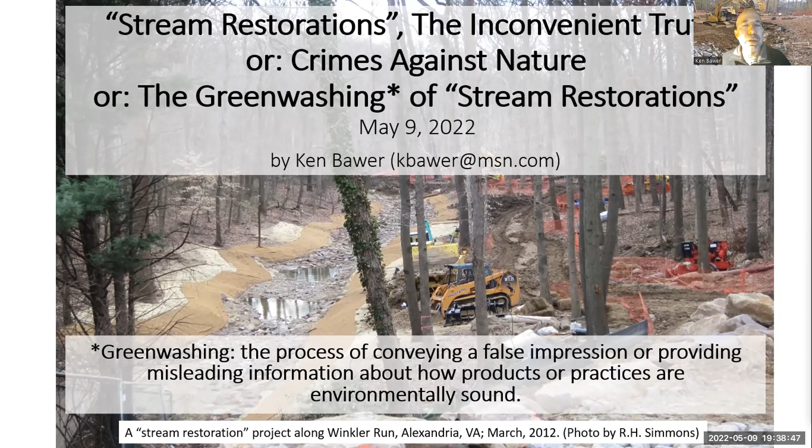I'm going to cut right to the chase in case you get bored. By the end of the presentation, most people ask, well, so what can we do? So let me just tell you right up front, I'm asking you to contact your elected officials at the county, state, and federal level and ask them to introduce a bill to ban stream restorations. This is not a radical position. We banned DDT, we banned thalidomide, we banned lead in gas, we banned lawn pesticides in Montgomery County. So this presentation will explain why this is so important.

Stream restorations are construction projects, pure and simple. And there are several different types of stream restorations, but the most common ones are engineering projects done to try to stabilize eroding streams by using heavy equipment, such as the excavator shown here, to modify a stream channel.

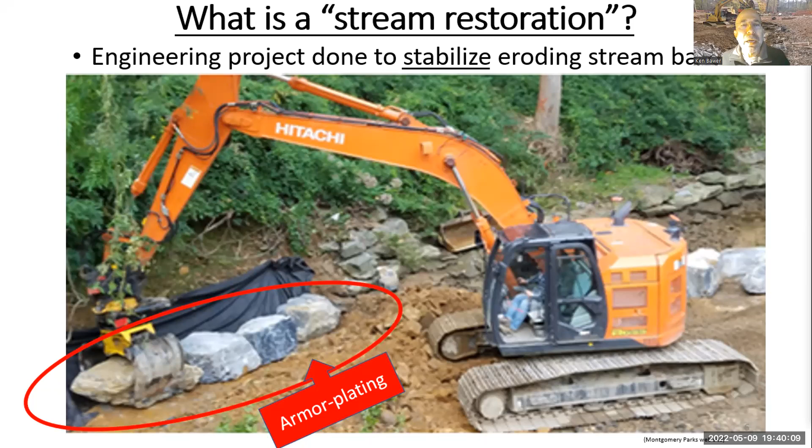And this typically involves a mix of straightening or changing a stream's natural meander pattern, placing heavy boulders to armor plate sections of the stream, as shown here, scraping away stream bank soil, using soil stabilization mats that may or may not be biodegradable, dumping fill material in the stream to raise its level, or even filling in the stream channel completely and moving it to a different location.

So why are stream restorations done? The primary reason stream restorations are done by Montgomery County and Montgomery Parks is to meet their MS4 permit, although as I said before, they are not required to be done. MS4 stands for Municipal Separate Storm Sewer System, and an MS4 permit is required for jurisdictions that have separate pipes for stormwater than for their sewer system.

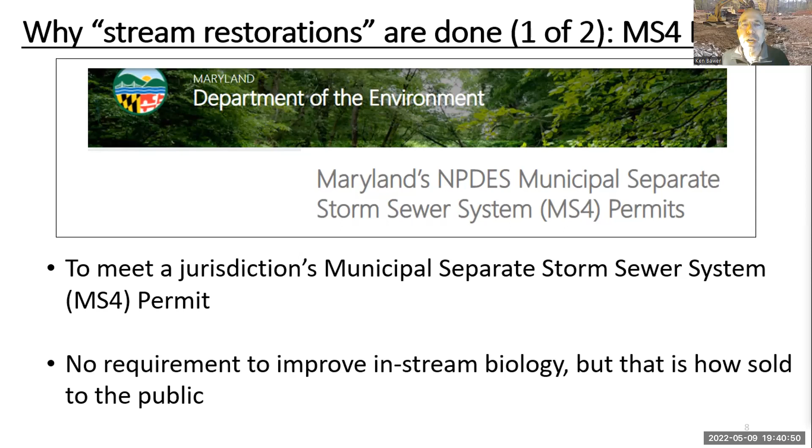The MS4 permit system is an effort to clean up the Chesapeake Bay by reducing the amount of sediment, nitrogen, and phosphorus, those three things that enter the bay from point sources. And the point sources in this case are the stormwater pipes that dump into streams.

So the inconvenient truth, contrary to the propaganda and greenwashing by the multi-billion-dollar stream restoration industry and their government enablers, is that stream restorations don't actually restore anything, not the streams themselves, either physically or biologically, and especially not the whole ecology of the entire construction site, which is always way beyond the stream itself, as you can see here.

This is a so-called stream restoration in Chevy Chase at Audubon Naturalist Society, of all places. It is not restored to look like any natural stream that probably anyone has ever seen. This area used to be fully wooded. And the rhetorical question is, how are fish and salamanders and other aquatic organisms supposed to move up and down this so-called restored stream? And the streamside plant community was totally wiped out.

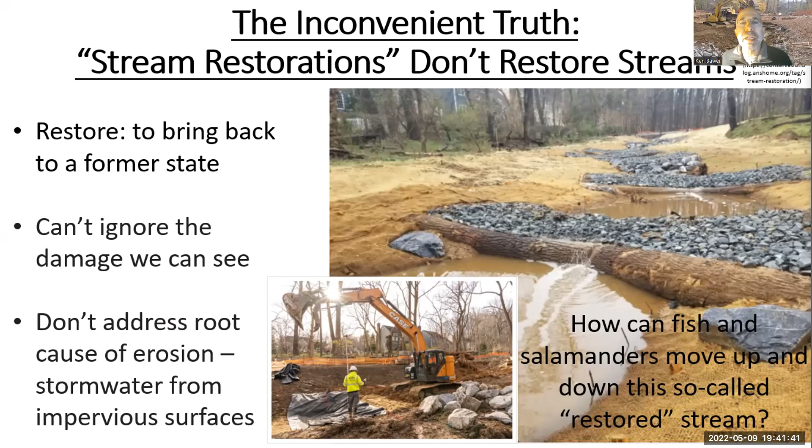So just to be clear, I am in no way opposed to infrastructure protection or repair projects, such as protecting undercut roads or exposed sewer lines, as shown here on the left and in the middle. These are necessary infrastructure repair projects. These are not stream restorations. And note, if you do an infrastructure repair project like one of these, they don't get MS4 permit credit.

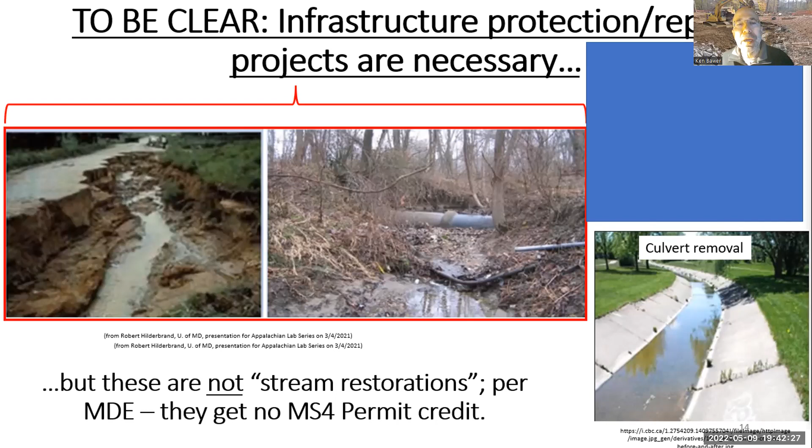Why? Because Maryland Department of the Environment, or MDE, says these are not stream restoration projects, like daylighting buried streams and removing concrete culverts. They're admirable projects, but they aren't considered stream restoration projects by MDE, and they get no MS4 permit credit.

These are photos of the Falls Reach Stream Restoration Project in Potomac. Before on the left shows a perfectly fine natural stream. Yeah, there's a bit of erosion, as all natural streams have, and no urban or suburban stream in Montgomery County is in pristine condition. The small inserts in the middle show some of the heavy equipment that was used for this project. And I took all these photos, except for the one on the left.

And the after photo on the right shows that the stream restoration completely destroyed the forest community in its footprint by scraping the forest floor bare. They destroyed the natural character of the stream by straightening it out, armor plating sections with stones, creating artificial rock dams that block the movement of aquatic organisms.

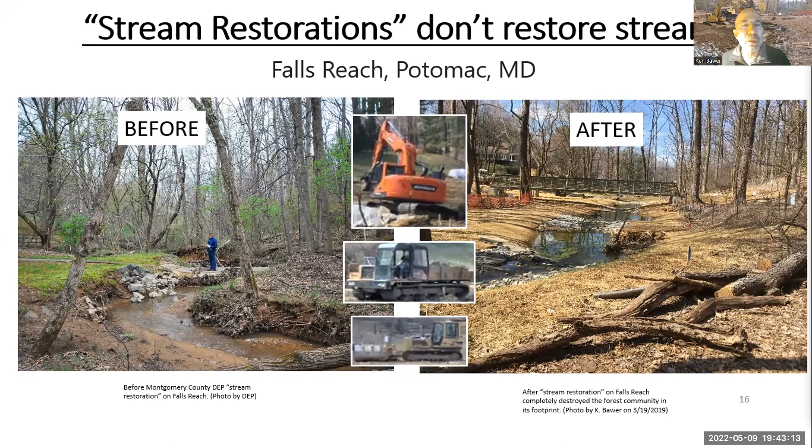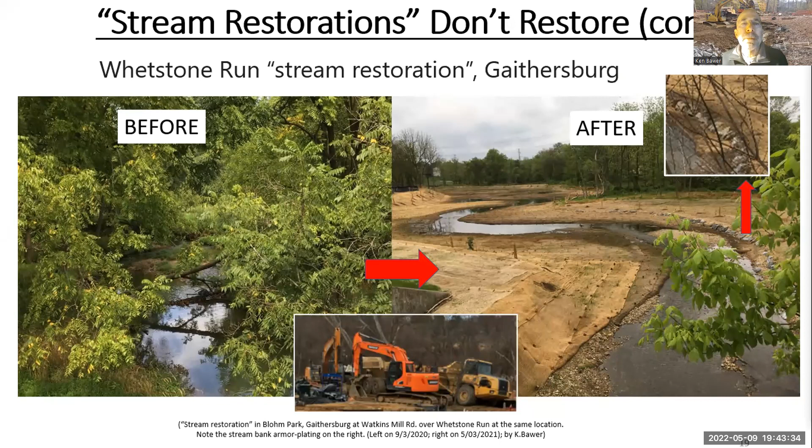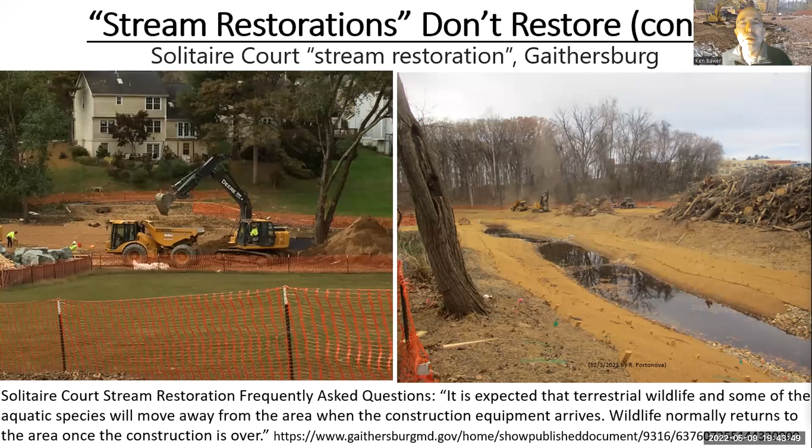This is the Solitaire Court so-called stream restoration in Gaithersburg. On the left, standing at this same location before the construction, none of those homes were visible through the riparian, or streamside, forest. And on the right, you can see that the former forest is now, what, a pile of logs. This is another view of the Solitaire Court project, a little further downstream. Again, this was a fully wooded natural area.

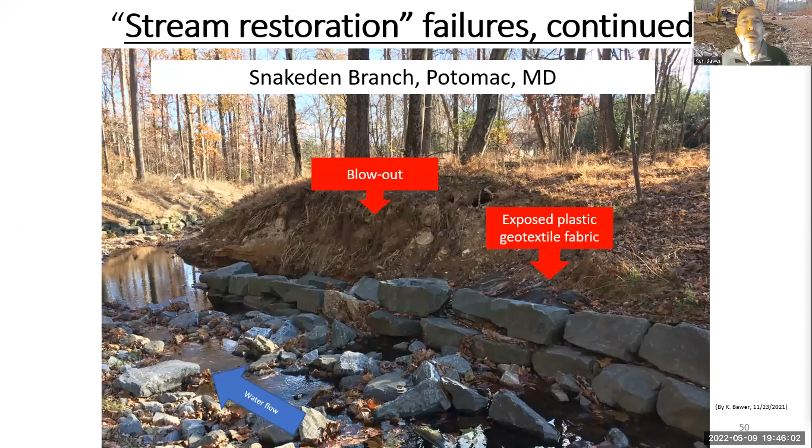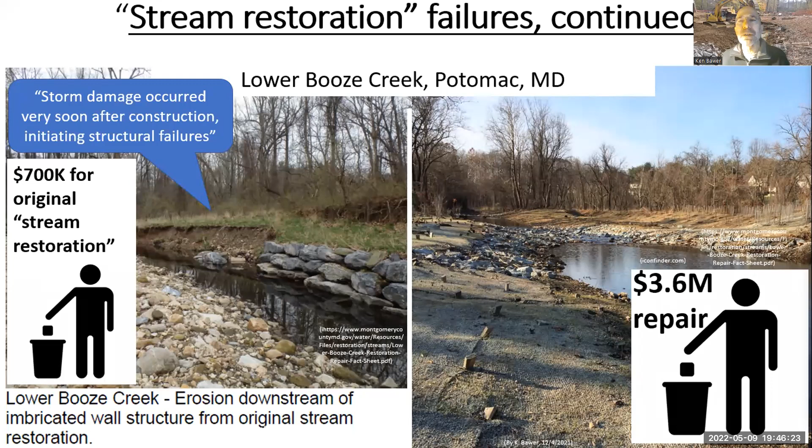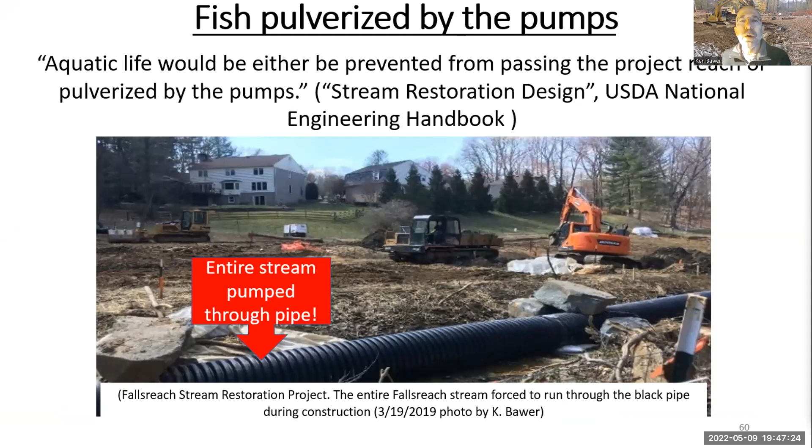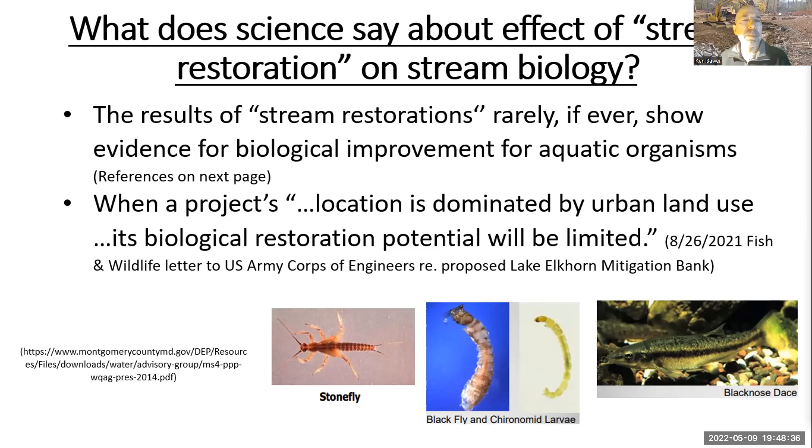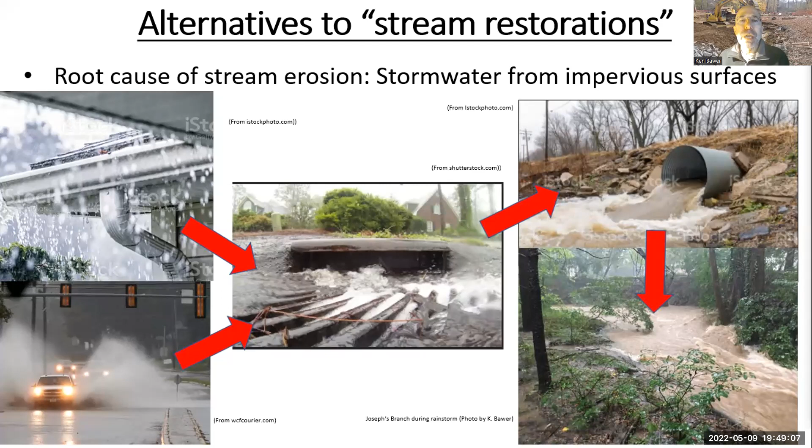So to understand the importance of stream restoration alternatives, first we have to appreciate the root cause of the major stream erosion, which is the stormwater from impervious surfaces like the roads and roofs. So this slide just gives an example, shows how uncontrolled stormwater from the roads and roofs, for example, flows into the storm drains in the middle, and then fire hoses through stormwater pipes and into our streams. Stream restorations do nothing to control the stormwater volume before it gets into the stream.

In the upper left is shown a bioretention, as it's called, where the cement curb is cut and stormwater from the road is diverted into planted depressions where the stormwater soaks into the soil and is typically planted with native plants. Next to it is a grass swale, which is the same thing without any plants. Permeable paving is shown in the lower left. Converting lawns to conservation landscaping is shown in the bottom middle. Green roofs on the upper right, and planting trees on the bottom right. And this is just a small subset of the tables that I showed you.

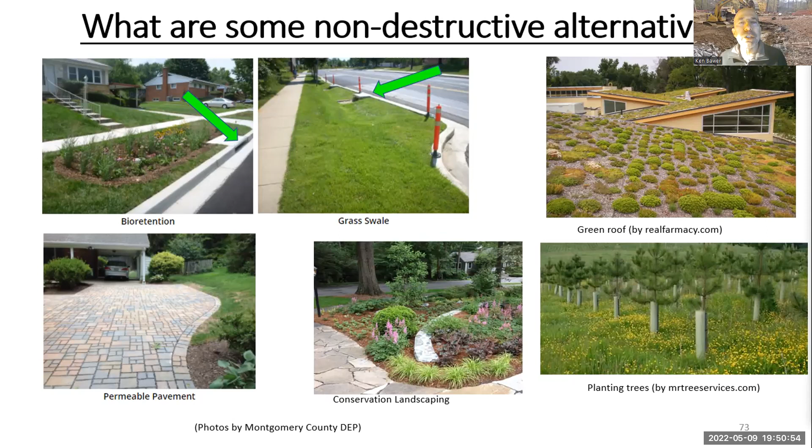So one of the objections that I get from local officials and the stream restoration industry is that there simply isn't enough land for upland stormwater control, but they never give any evidence to back that up. All you have to do is open your eyes to see locations for upland stormwater control almost everywhere.

Number two, stream restorations don't address the root cause of stream bank erosion, which is stormwater fire hosing into streams from impervious surfaces like roads and roofs. As a result, stream restorations are being blown out across our region. Number three, the science tells us we should be protecting our forested areas since they counteract global warming by carbon sequestration, even if they aren't in pristine condition.

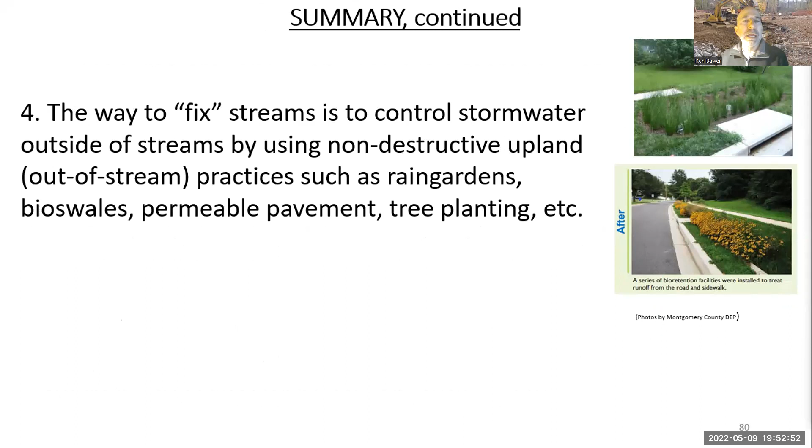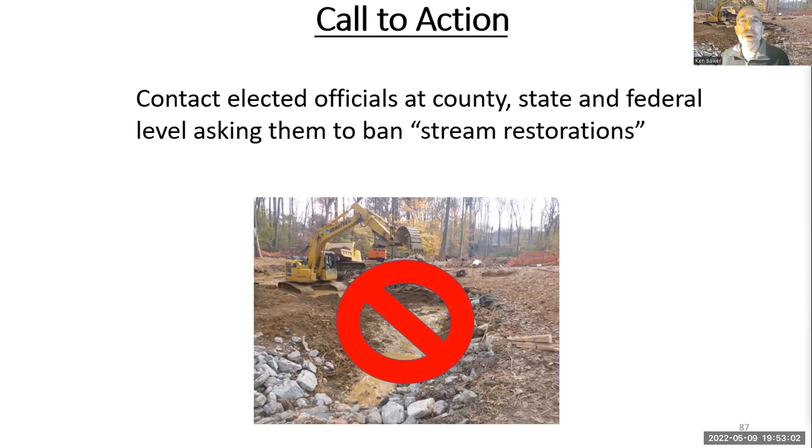And lastly, number four, the way to fix streams is to fix the problem at its source, to control stormwater outside of streams by non-destructive practices such as rain gardens, bioswales, permeable pavement, tree plantings, etc. So finally, to repeat my call to action, I ask you to contact your elected officials at all levels of government here in the county, the state, the federal, and ask them to ban these so-called stream restorations.

So that's what I have, and I'd be happy to take questions now or whenever Alan would like.

That was fantastic, Ken. Bailey is managing this program, as you know, and the Civic Federation is part of the group, the Stormwater Partners. And I know that there's been a big debate within Stormwater Partners about keeping the water upland and the stream restorations. Can you close the PowerPoint and address that issue about the debate within Stormwater Partners and which way you think that's going?

I'm intimately familiar with that debate. I was co-chair along with Kit Gage of a Stormwater Partners Network working group to try and come up with a position on stream restorations. And the way it shook out was that we had to agree to disagree. Some people are in favor of stream restorations, and some people like me are adamantly opposed to stream restorations.

I will say that everyone, including the people that are in favor of stream restorations, they all agree that we should be controlling at least some of the stormwater upland, as it's called, out of the streams before it can get into the stream. So we agree on that.

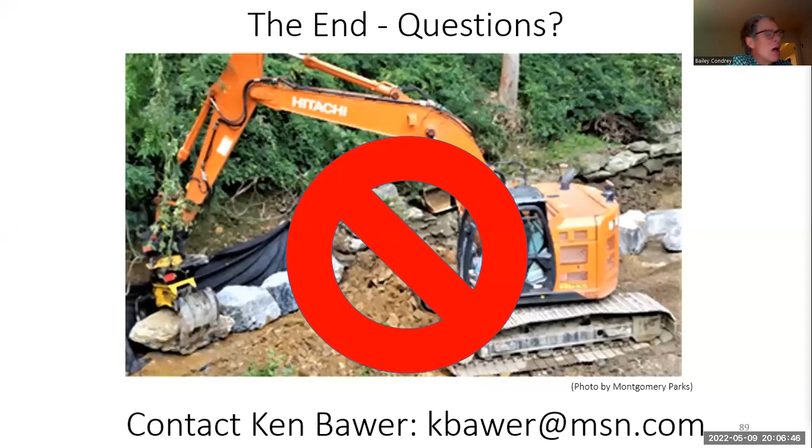And we brought this site to DEP's attention. We brought another site to their attention, which is within walking distance of Kensington Parkwood Elementary School, but we get nowhere. And their mantra is, well, there just aren't enough areas to do upland stormwater control. It's like, really? Open your eyes. Now, I throw that out flippantly, and I understand it's not a quick solution, and it's probably not going to be a cheap solution.

But DEP will try and tell us, in fact they say, this is an emergency, essentially. We've got to stop the erosion. It's like, wait a minute, this erosion has been going on for 200 years. Yeah, it's greatly accelerated since the 1950s. This has been going on for decades and decades. There's no emergency. There's no immediate need to bring in heavy equipment and do a fix and say it's done. There's no urgency. They try and present it as such.

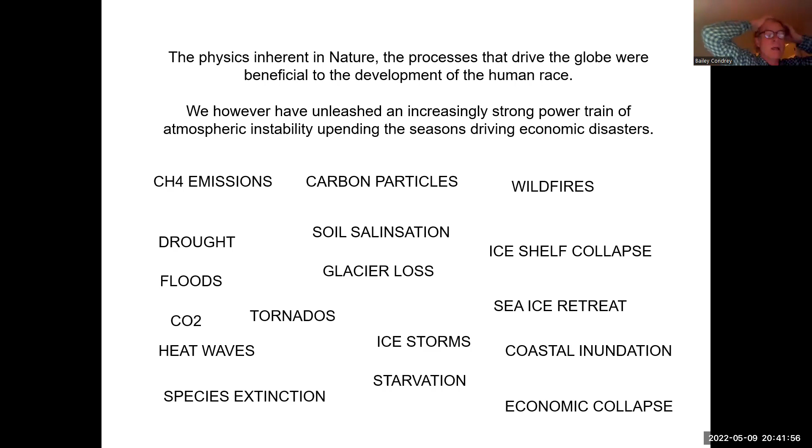So there's some simple concepts wrapped up in all of these words. We're killing the planet's albedo, its ability to reflect sunlight. We're losing freshwater resources at alarming rates. In the news just recently, the dams on the Colorado River, I believe it's Lake Mead. Lake Mead has fallen to a level so low that they may not be able to generate hydroelectric power to the metropolises that it powers, such as Las Vegas, Phoenix, other large cities in the Southwest.

And our ability to rebuild infrastructure, communities, and homes following weather-related disasters is becoming economically unsustainable. Next slide.

Yeah, that's why you should be doing this.

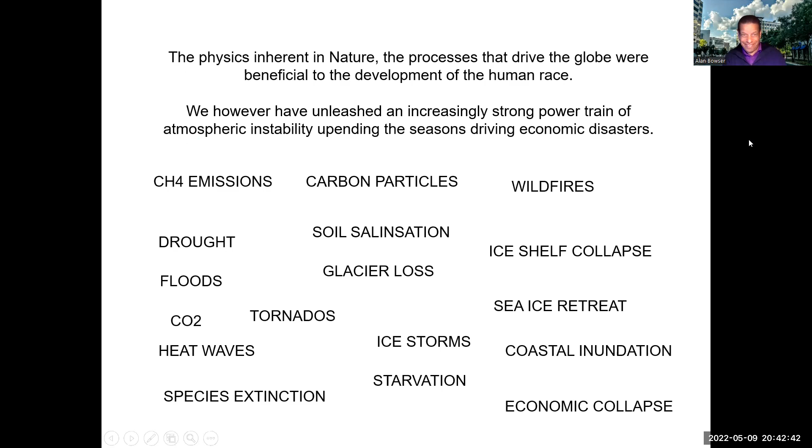So when we think about where we source our food, kelp has become a powerhouse locally in New England. It is striving to make inroads into other areas of the United States as a food product. It's in a lot of food already. It's in yogurt and a number of other prepared foods. But one of the incredible things about kelp is it requires no carbon inputs, just as shellfish require no carbon inputs. There's no fertilizer, there's no irrigation. They just exist in a state where man has the ability to harvest them without doing a lot of damage to the biosphere.

And on a positive note, there are thousands of people around this county that understand what's at stake, and they're working vigorously and tirelessly to improve our resilience, educate the masses, and convince politicians to be bold. Next slide. So the next slide is just more groups. And anybody is able to join any of these groups. I don't think that they are exclusive. And the list, of course, is not exhaustive. And Stormwater Partners isn't on the list. It's one that I forgot, but we had worked with them for years, and they've done great work. Next slide.